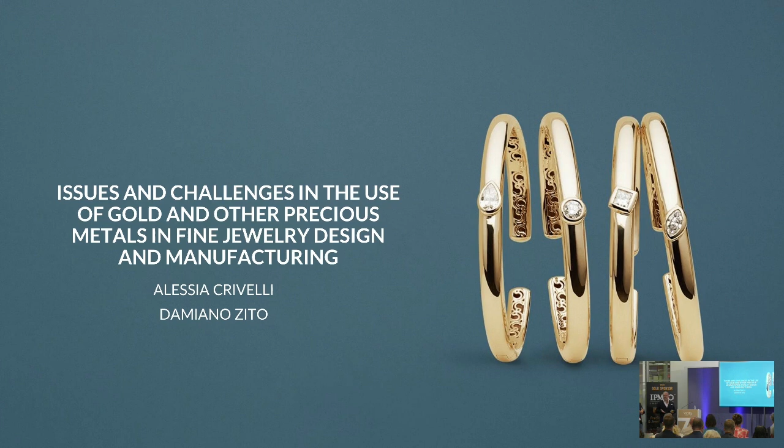We have something like 254 slides, so if we have time - let me start just reading the title. We were asked to give you an insight about our experience, our daily experience, and see which are the issues and challenges in the use of gold and other precious metals in fine jewelry design and manufacturing. So what we are bringing here is an insight - we do not bring you graphs or numbers much, but only everyday experience.

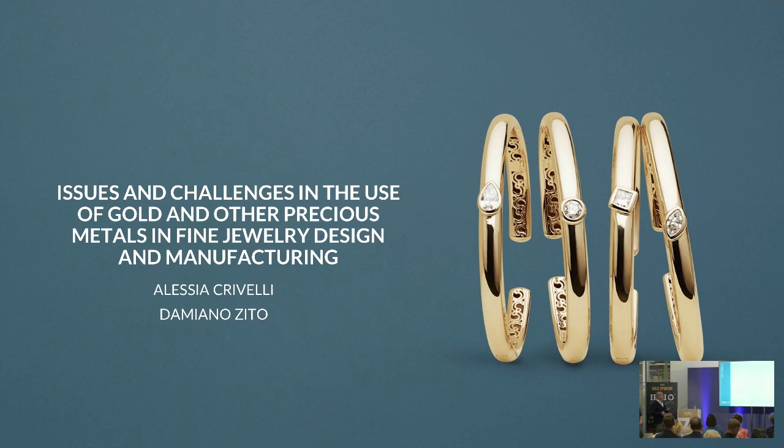The presentation will be divided in 4 points. Me and Alessia, we are going to jump to different slides. The more technological slides I will speak, and Alessia will speak about ethical sourcing and sustainability, not at the deepness that you were all talking about today.

So we will just give you a point of view really from the goldsmith bench. And then we will go for the technological innovation, talking about what are the most common technologies used today, their advantages or disadvantages, how they are impacted by the gold price, and how they are impacted from a sustainability point of view, and also what their carbon footprint is if we go in deep to see.

And then Alessia will talk about the economic and market challenges. So what is happening on the bench when the gold price is going up and down, how the orders are changing, or what is happening from a manufacturer point of view. And then we go to the end, talking about future trends and opportunities with a very important focus on technology, but also having a point of view from the educational side that Alessia will talk about.

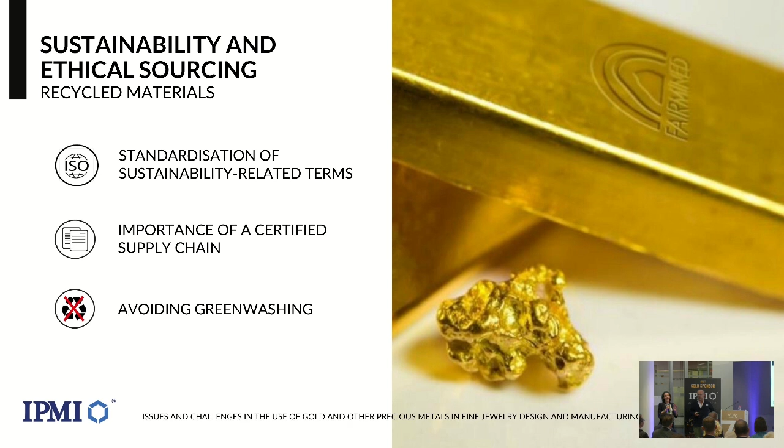Let's move to technological innovation. I wanted to give you an overview of the technologies most used for producing jewelry. Today, almost 85% of jewelry is produced using investment casting and CNC machining. The latter, CNC machining, has been gaining very important traction in the last 10 to 15 years. It's still typically used for producing watches, but its ability to work more complicated geometries has made it very attractive for jewelry too.

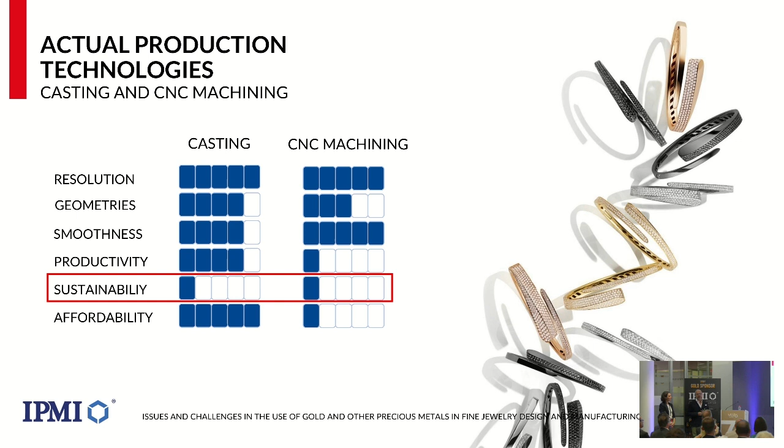Both technologies have several strengths, like surface quality, surface smoothness, and production capacity, especially with casting. But from a sustainability point of view, from the ethical side, they are not really very green. We can see this in the next slide.

Looking at the yield: for example, a company with an output of 200 to 300 kilos of jewelry produced by CNC machining has to start from 1 ton. And when they start from 1 ton, they go down to only 20 to 30% yield.

Then they produce chips, but in high-end jewelry manufacturing those chips are not remeltable. You can remelt them, but then there's a risk of contamination by the machining tools containing tungsten or other carbides or metals not soluble in gold, which give a common defect called hard spots.

So one issue is that when you go to the refinery, you lose a lot of metal, or chemicals get involved, and finally the carbon footprint of that process is very heavy. And then there's the quantity of inventory.

According to our investigation, if someone has exactly an output of 1 ton per year, they have to hold an inventory quantity between 300 to 500 kilos every day. This is really something that for CNC machining you can't escape.

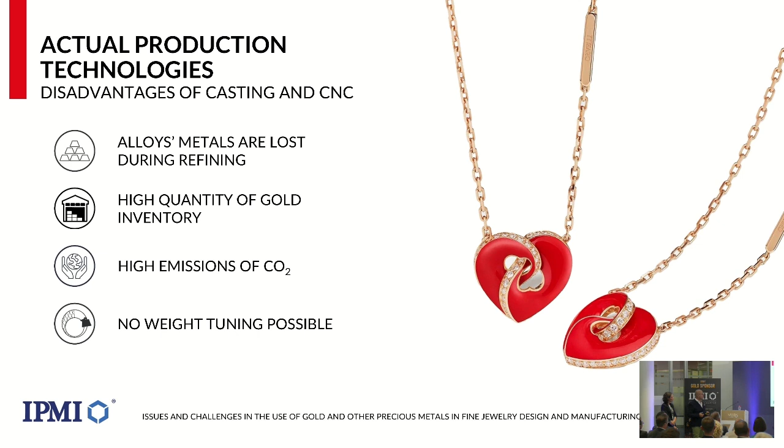So to help with this possibility, there's another technology I'll talk about later. Now, all these things are impacting on, and they need gold, and gold price is growing, and they both have a very high carbon footprint value. Already in the last 15 years, a technology called powder bed fusion has been getting more and more used in jewelry.

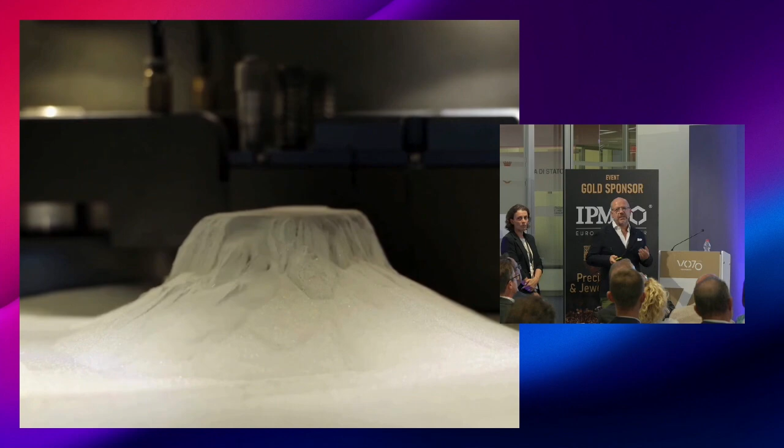But compared to the previous two technologies, the sustainability is very high, because there is a single phase from the design to the part. Starting from a metal powder is not much different than starting from a pre-alloyed 18-karat casting grain. There is a difference in terms of energy involved to produce powder, but not much, as people might think.

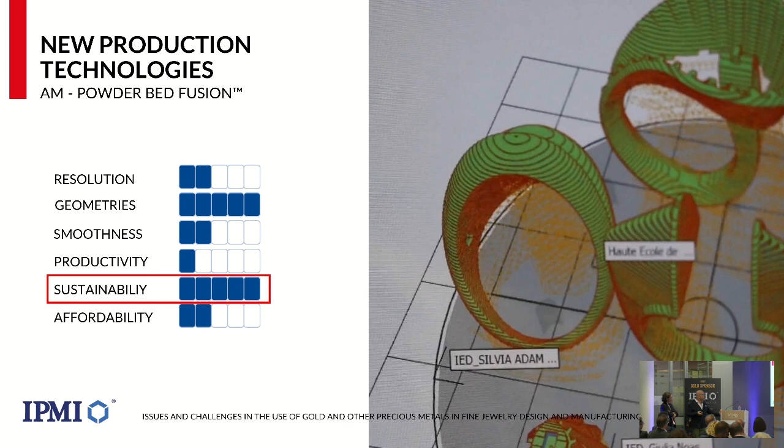So the advantages of the technology are mainly opening new geometry avenues, but the most important thing is weight tuning, for two main reasons. For marketing positioning: you have a designer making a ring that weighs 15 grams, but you need that ring at 13 grams without changing the apparent volume. How do you do that? You empty it inside.

But you don't make it super hollow, you just make it a little hollow. And this is something you can do only with additive manufacturing.

On the other side, you have something too heavy, maybe 70 or 80 grams, and for wearability reasons you need to drop to 50 grams. When you drop to 50 grams, you have two choices: either you make it separately and then assemble, but when you assemble you have the soldering line, and this is an issue on high-end jewelry.

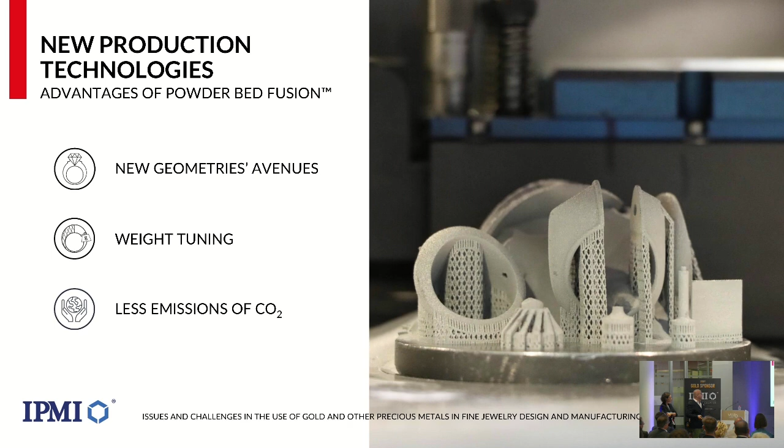Or you make it empty through that technology, and the emission of CO2 is really much lower.

Here we have an example of a paper we presented already 6 years ago at the Santa Fe Symposium, doing a calculation comparing direct casting with powder bed fusion, also called selective laser melting or direct metal laser sintering. For a single ring of platinum 950, the additive manufacturing powder bed fusion was producing 261 grams of CO2 compared to over 600 grams.

And this didn't count all the energy or environmental impact to dispose of the investment. You have to consider that for every 2 to 300 grams of cast part in jewelry, you have 2 kilos of investment. So once you've made that investment, you need to treat or do something with it, and that was not considered. This was only the energy needed for the entire process.

But it's quite intuitive: a single phase process needs much less energy than a process where you even risk inefficiency at every single phase, compared to casting where every single phase has a yield and you misuse energy at every single one.

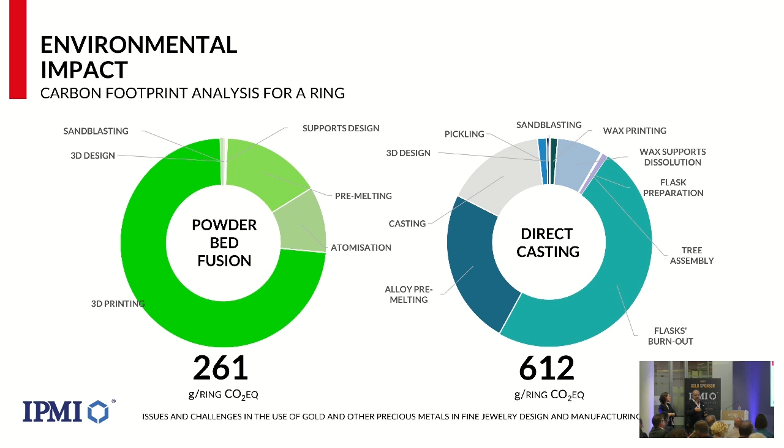Another thing taken into consideration, from our point of view in the supply chain, is how to use artificial intelligence.

We also presented another paper at the Santa Fe Symposium this May in Albuquerque, where we talked about taking the last 20 years of data about the physical, chemical, mechanical, and technological characteristics of all the alloys in our range, and using it for machine learning to try to predict those mechanical characteristics for a new composition.

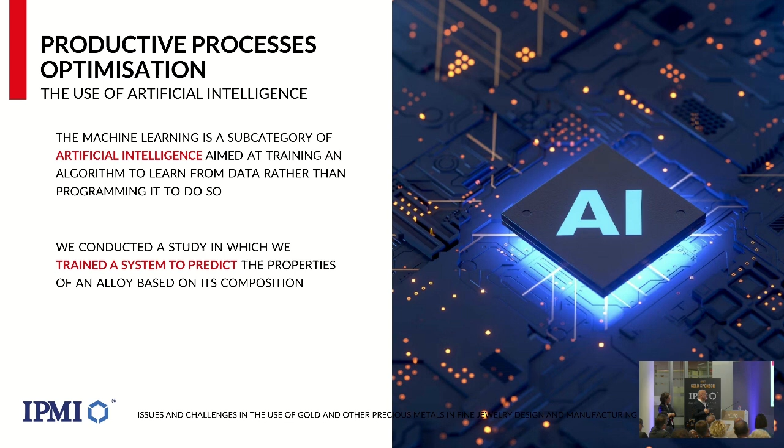So starting from another recipe, we predict what the characteristics will be. The characteristics we were checking were the color, the viscosity of the molten metal, the melting range, the tensile strength, the heat transfer, the elongation, hardness, and deep drawing.

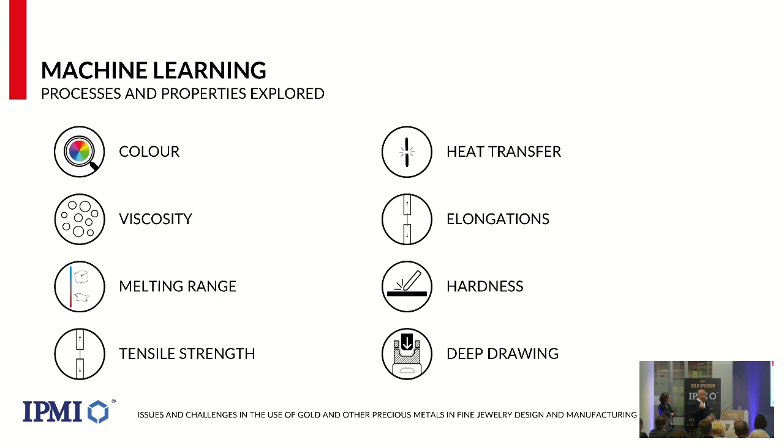Usually it takes something like 15 days for an R&D person to do the characterization, because you have to prepare the sample and measure every single characteristic, with a lead time of 15 days compared to a simulation time of a couple of hours.

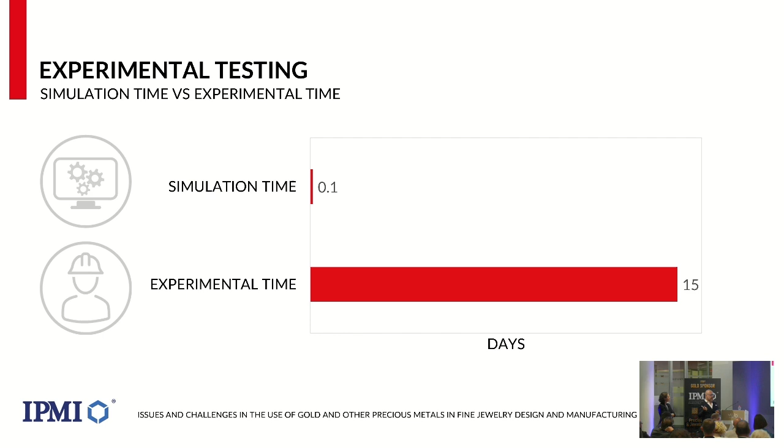The standard deviation was very interesting: for the solidus temperature, the difference between the real value and the simulated one was in the range of 2 Celsius; for the liquidus temperature, 5 Celsius; for the tensile strength, 10 megapascals. Similar accuracy applied to other characteristics like hardness and melting range.

And in terms of another topic of today, the carbon footprint of characterizing an alloy: you have to melt it, use gold, and use energy, and that has an impact. It's like writing letters versus sending an email. Of course, even the email has a carbon footprint, but a letter has maybe much more.

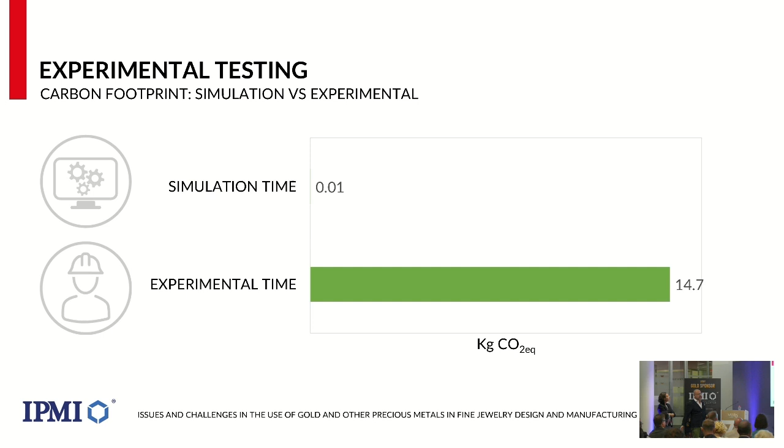This will be really another advantage. The future development in this case is something we will really work on: starting from a specific characteristic, like the melting range, the specific color, or the specific mechanical property, we go back to the recipe and get the chemical composition of an alloy.

This doesn't mean we will stop doing the characterization, but instead start a process of developing an alloy with 20, 30, 40, 50 candidates. Then we will have just two, and this will have an impact on the environment. This is not only nice marketing things, this is something that really works.

We started from a scientific side, and now we really have the possibility to take advantage from this. I wanted to show you, this is the last example of the technology that we love to explore. There was a very nice case history when Bugatti was developing their model called Veyron.

They were doing the crash test, and they were destroying 16 Bugattis without getting results. 16 Bugattis, at 2 million each, cost 32 million. There is a very nice post on Instagram where the CEO of Bugatti and the CEO of Dallara, a company doing crash test simulation, tell the story.

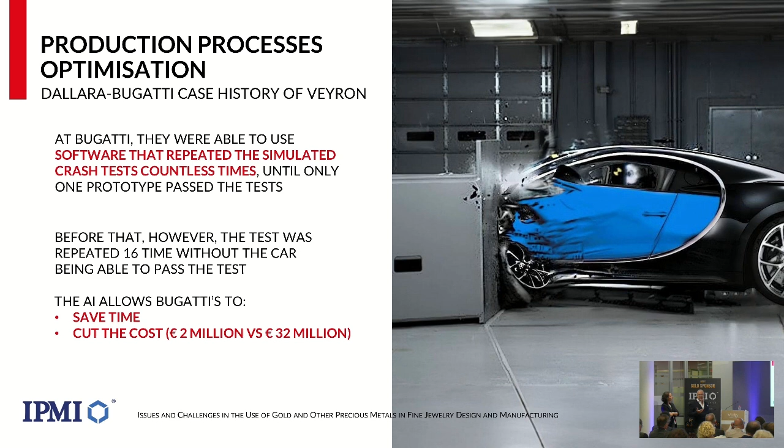So this is nice. What can we do in jewelry? There are some tools we are not using, like casting simulation. It's already been 20 years that casting simulation is on the market, but the reason it's not much used is that to make that model work, you need data.

To have data, you need the physical characteristics of an alloy. We have equipment at our R&D department for measuring the liquid alloy viscosity, which is not easy, or measuring the shrinkage of the alloy from liquid to solid, or measuring the solid fraction and liquid fraction during solidification. All this data makes the prediction very close to reality.

What is changing is that the time to market is very short, and the number of flasks you make is much less, so it all has an impact. Maybe 20 years ago, the amount of data available, the physical characteristics, were not available, and that's why simulation was only something nice to see, not a device predicting where the porosity was going to be. This is really an important tool.

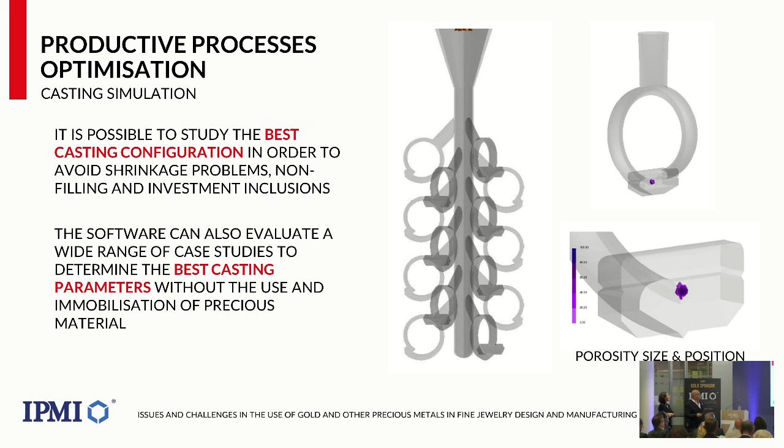What I want to show you, and want to put your attention on, is for our young generation this is normal: they use AI, they use virtual reality, they use all the innovated instruments we have as a normal thing. We are still thinking about how we can use it, what is the better way to use it. For our young generation, that is normal.

And the result, I saw the bachelor presentation last year, and the results were amazing. They created, I think, final products and final jewelry, very amazing. So I want to show you this also because it's normal for us to use this kind of process in the school, in the education of our young generation; we use all these instruments, all these programs.

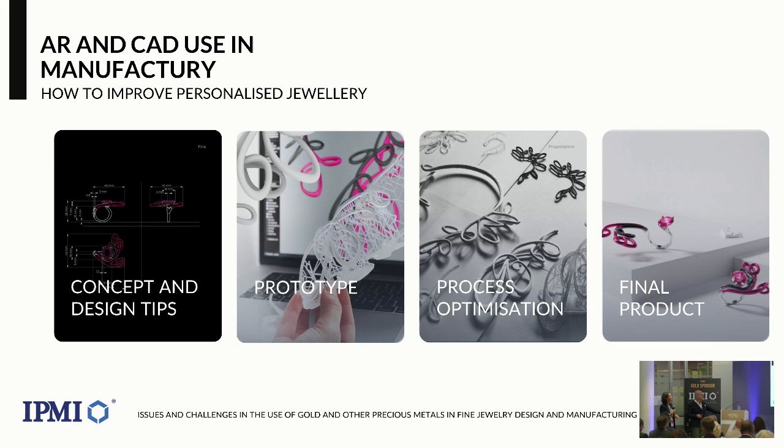This had to be a value. So what we try to do with our customer, in our experience in our company, is to communicate the value of the manufacturing we sell. And not just we sell, we produce and we create.

So gold is one of the main important parts of a jewelry creation. Inside there is a very important great material, but also there is the creativity of a man or a woman. And there is a dream before. There is a lot of work in a very amazing and very strong supply chain.

Because when I have a new idea, I want to create a new collection, I ask Damiano, what is the best way to produce it? If I have an idea and I have to produce it, and I want to be sustainable and I want to do the best practice, because this is our meaning of supply chain.

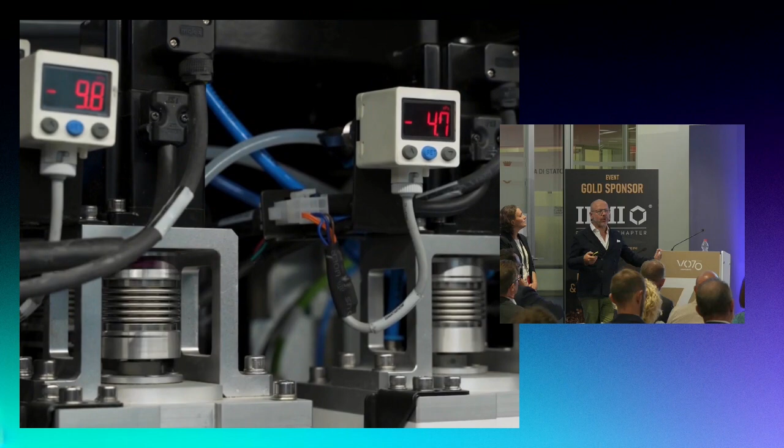And we go to explore more from the technical point of view, in terms of additive manufacturing - the technology that personally I'm very much fascinated by, and in my opinion it will really be the one technology that makes additive manufacturing totally embraced in jewelry manufacturing. I'm talking about nanoparticle jetting.

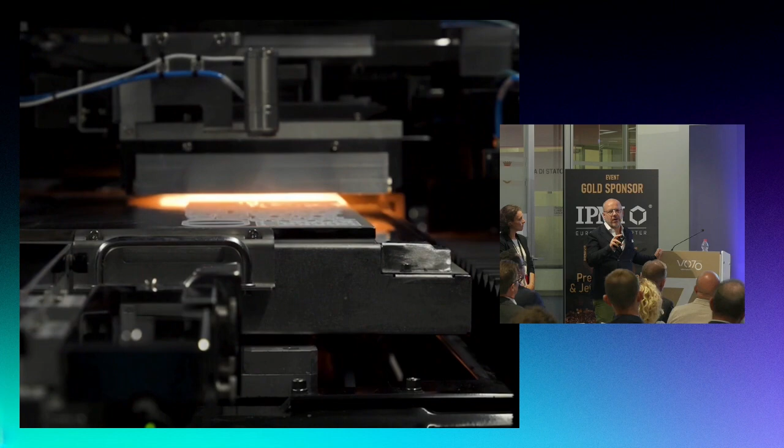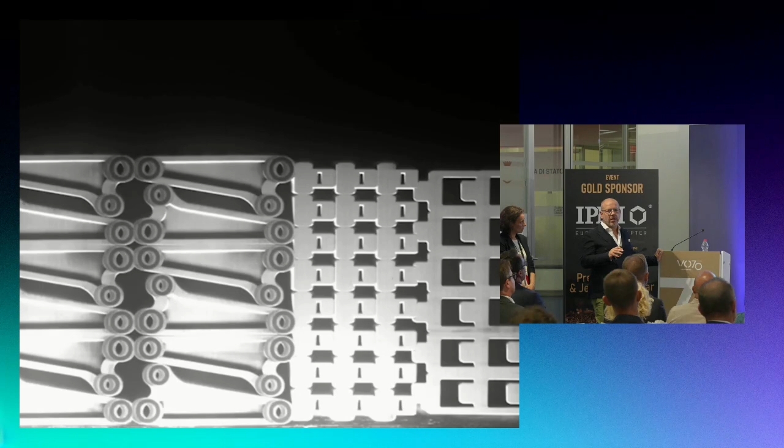There are, I would say, three different technologies that are commonly called 3D printing or 3D metal printing. One is powder bed fusion, using a powder bed as I spoke before. A second one is called binder jetting, which also uses a powder bed but is a sintering technology. That technology has the same limitation as powder bed fusion - very high production capacity, but the surface is rough.

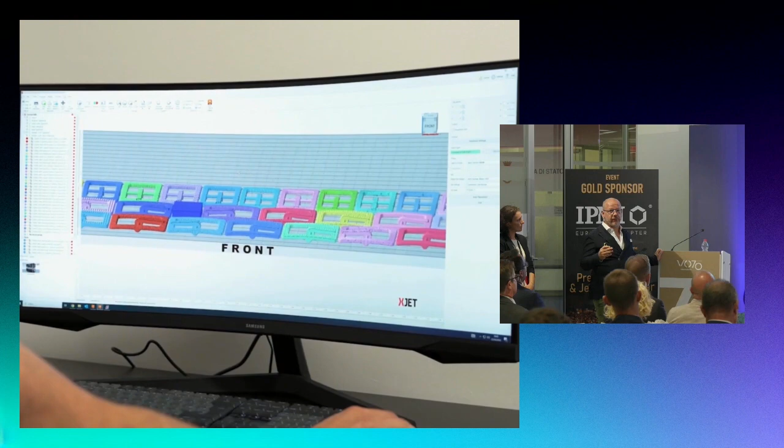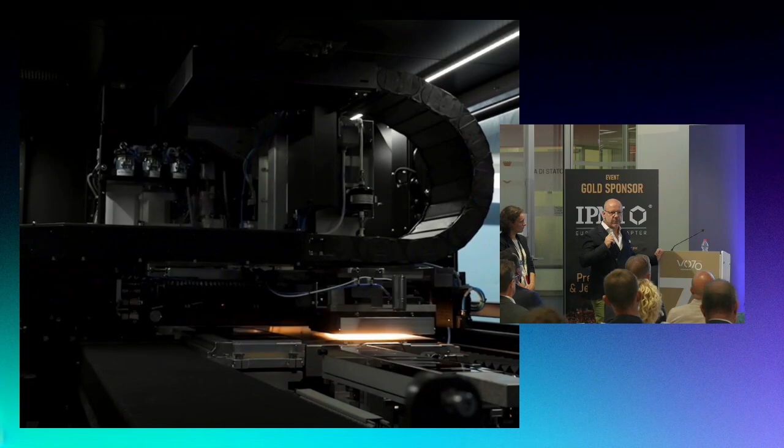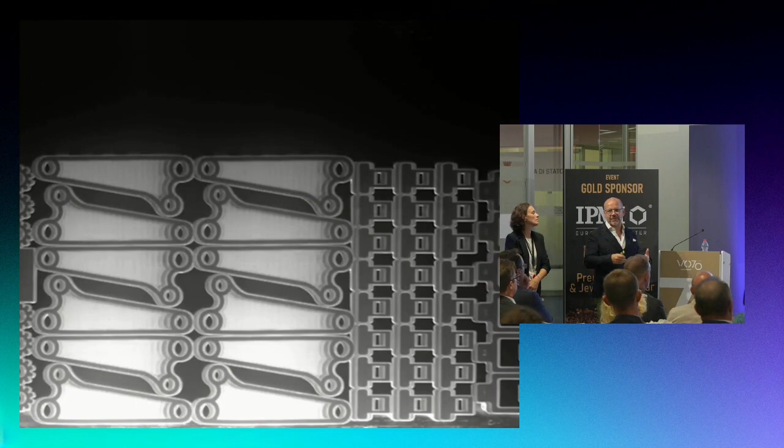But nanoparticle jetting is totally opposite. Like a printer that we have in the office, it uses an ink, and the ink is sprayed on the building platform. You don't need a huge amount of metal. So we are talking about precious metal - the less gold immobilized, the better it is. And using nanoparticles, the resolution is amazing.

The level of roughness is something like 20% lower than investment casting. Investment casting, in my point of view, is quite smooth, and this is really much lower. The production capacity is quite high, not as high as binder jetting technology, but we are in the range of 3 to 500 kilos a year for a single printer, which is a decent quantity.

I will say that if you go with binder jetting, you can even get 5 tons a year, but then it's something rough. And the problem with something rough is not that the goldsmith takes longer polishing - the problem is that when you do intricate jewelry, you need to reach every single detail and part. So you can print, but you cannot finish, and this is an issue.

When you have a surface quality comparable to investment casting, then you are at the same level as the state of the art. So if they do it in casting, they can also do nanoparticle jetting, reducing very much the gold inventory for one reason.

What I'm personally dreaming of is the combo used with CNC. So I love - and not just me, but all visionaries, all the early adopters of additive manufacturing - they love very much to think about additive manufacturing and subtractive manufacturing.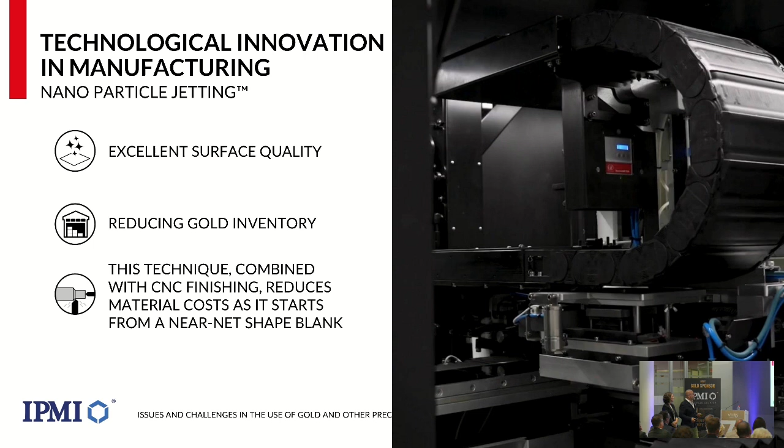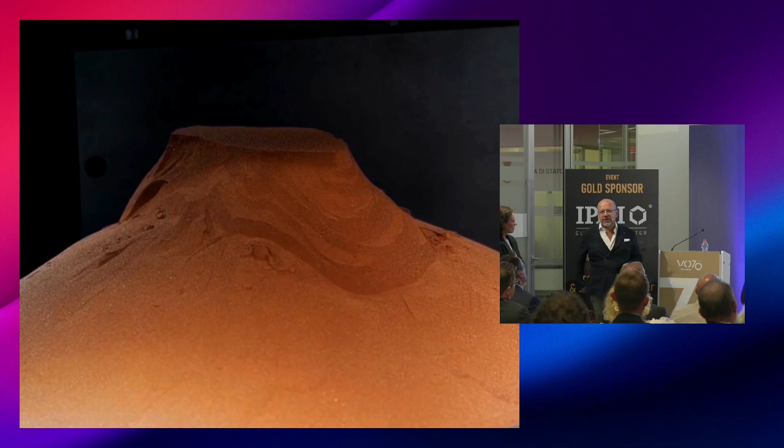Another nice technology, but this one is something that, in my opinion, is compensating for the lack of human resources. And maybe Alessia will help me - one very critical point in jewelry is that there are no young people, no goldsmiths wanting to, and something very nice...

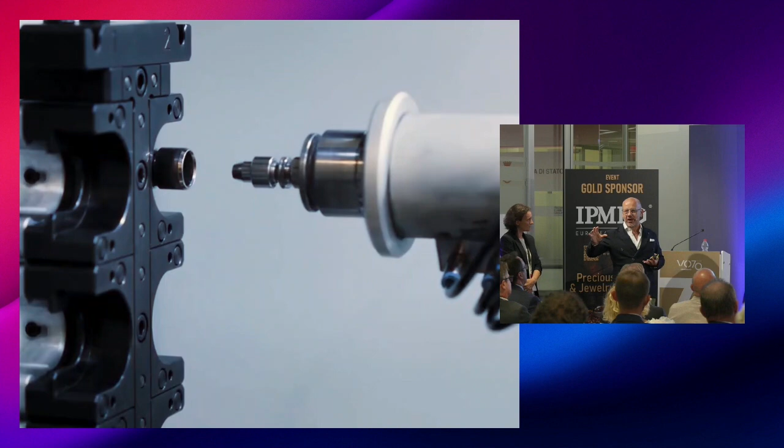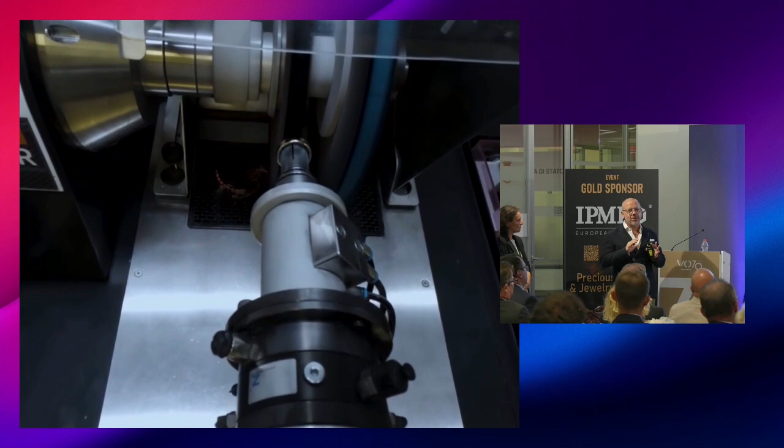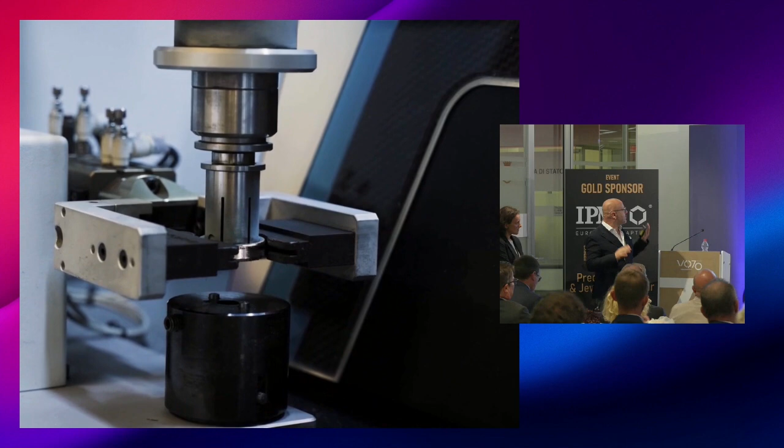One of the reasons why CNC was taking traction was always also because of the complexity of things it can do, but also the fact that for many productions, you don't need a very highly skilled goldsmith, because you don't have to grind the parts - CNC is doing it. Then you just have to do the final polishing. So there is this technology that, of course, maybe in watches is used very much, but in jewelry not much. That is amazing.

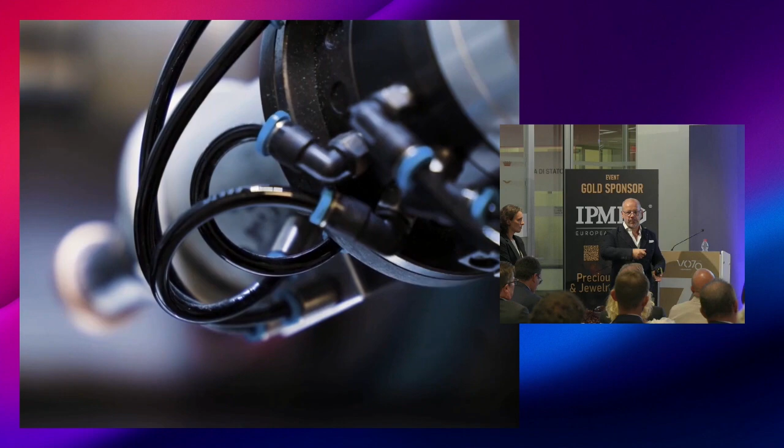It takes a few minutes to train. You don't have to write codes - you teach the robot how to polish, and after 10 to 15 minutes, you're able to polish a part. And then you put it in memory.

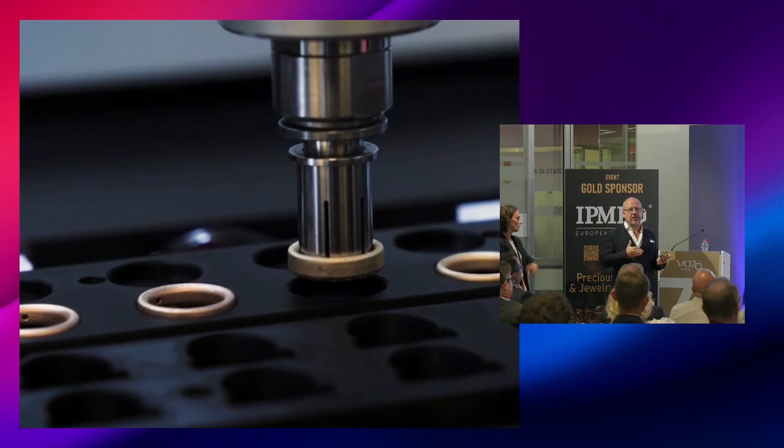And this is really something that the industry has to stop thinking about with the concept that a new technology is substituting an old one. No, a new technology is complementary to the old one.

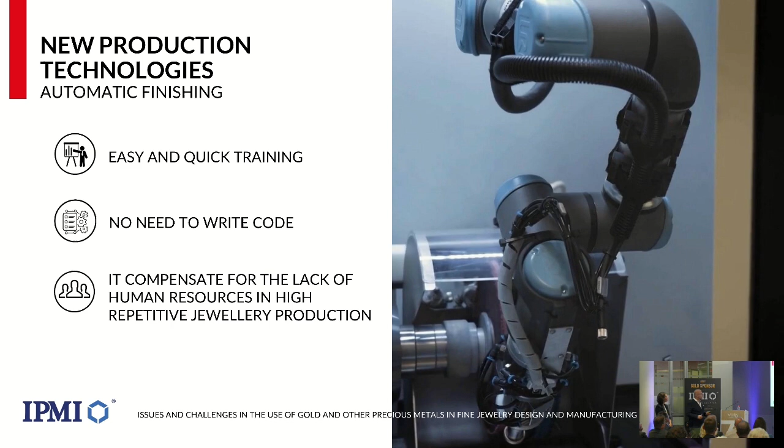So we jump to the conclusion. Start with, first, I have some part of my production that maybe I can start to use CNC machine for. As manufacturing, we use a lot of very precious stones, so sometimes we create the ring or the necklace or the earrings around the stones - we start from the stone and then we arrive at the final item.

So this is an innovation, and I think it should be a part of the future of our industry. So what I want to say in my conclusion is that we have a very interesting and amazing young generation approaching our job, our work. And in Valenza, we have a foundation that works with the young generation, and we are 50 companies, some very important companies inside.

And we are working on the attraction on our beautiful world, because sometimes the young generation, they don't know the reality.